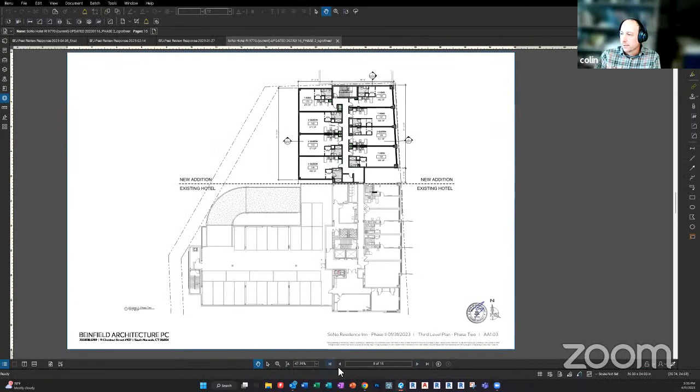There's a pocket park, I'll call it, for lack of a better word—essentially an alleyway between the two buildings created to accommodate the necessary utility transformer. We tried to reuse as much of the space as possible for function space associated with the hotel. Initially, it was our hope that it could be located further towards the street and adjacent to it, maybe create a gate that could make it semi-privatized or opened up to the public if there was an event, with people filtering in and out of that space.

But in discussions with the utility, that proved to be in contradiction to what they were looking for in terms of securing access to their transformer and being able to pick and replace it in the event of an outage or a malfunction with the equipment. So we felt we made the best compromise for the space and created this outdoor space as an annex off of the indoor hotel function space that could be used by people renting the space, with a bit of private outdoor space available, creating an urban courtyard.

This creates an urban courtyard for the hotel's function space.

It's not a particularly generous space, but in my own personal experience, sometimes these spaces can be quite special. If you're surrounded by brick facades with nice lighting and some nice furniture appointments, it could be a nice spot for a wedding reception portrait or some sort of party.

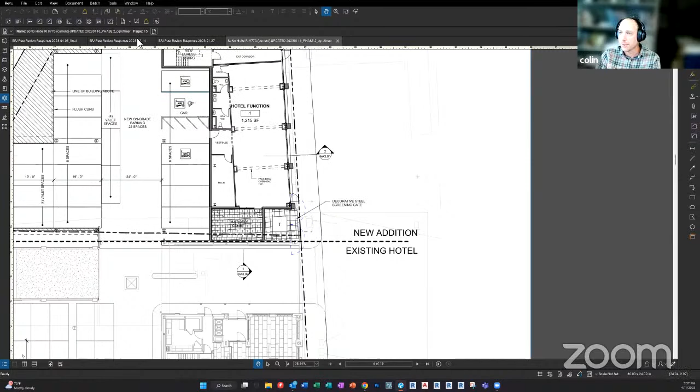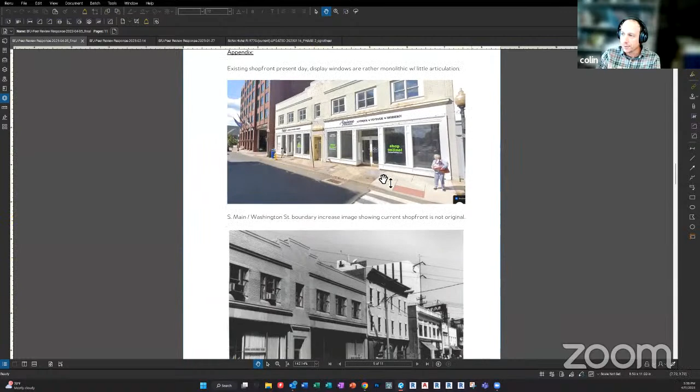The other item we didn't take particular exception to was that he suggested we raise the sills of the windows, specifically the shop front windows, to be more in line with a traditional shop front that's elevated a little bit. We don't have any objections to that, so we will gladly raise it. It's also a little bit better of a waterproofing detail for us, so that's not under dispute.

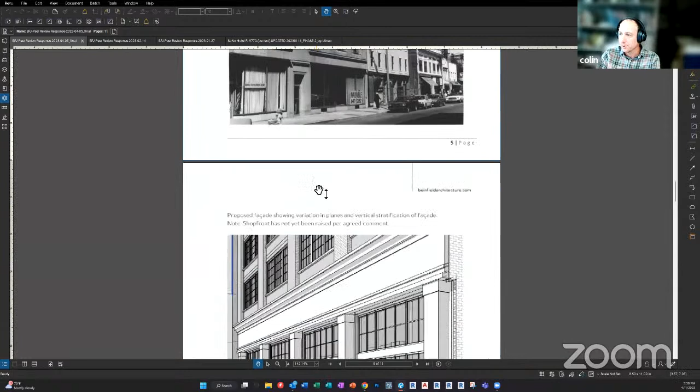The last piece we really took objection to was the further recessing of the windows and the glazing plane of the hotel. We feel that it's already articulated fairly extensively compared to a lot of modern buildings that get developed. The glazing plane is already stepped back fairly far—it's a deep recess from the overhead, about 18 inches.

The pilasters project pretty proudly. The distance to the glazing plane, once we construct the lower wall, is probably going to be a little more than 18 inches, more in the neighborhood of 20 or so, once the panning and other things are installed on the window. That's a fairly significant step.

You also have the entablature projecting forward a little bit. It's detailed, with some profiling and moldings that give it some meat. It's fairly tall in terms of the signage band, so it has good presence. There's architectural lighting on the pilasters, and that's more or less in line with the brick pilasters up above, as you can see. The face of the signage band is more or less even with the face of the pilasters, and the pilasters up above are proud of the facade, the plane that the windows are in.

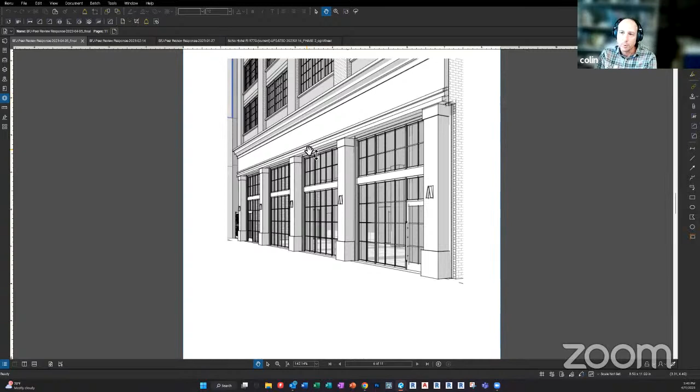So we feel like we've already got a lot of planes going on there, and this is a very constrained lot. Moving the glazing plane further inboard, we don't feel is going to improve the architecture any, and it's only going to take functional space away from what we hope is going to be a vibrant internal space.

Based on recent projects we've done, like the one on Chestnut, this is the interior of a double volume space we did right on Chestnut Street. There's been a couple times in the past year since the building's been occupied that it's been full of life. There was recently an artist market this past fall, I believe, with probably 100 or so people and various vendors in there, kind of a pop-up bazaar, if you will. There was lots of activity going on, and it functioned really well. It was a space that felt good and didn't feel overly constrained when people were in there.

Narrowing up a space like this, even by a few inches, is going to really impact the amount of program that you can squeeze in there. When you're talking about your electric room, your ADA accessible bathrooms, and other back-of-house services, a lot of those things these days, as we trend towards more energy efficient buildings, just take up more and more space, because we're dealing with equipment we didn't have before, like makeup air units and higher efficiency air handlers. The electrical requirements continue to evolve, and everybody wants their equipment to be safe.

So there are service clearances that need to be adhered to, and sometimes inches do matter, and compressing that space further is just going to be detrimental to what we can do in that space. I didn't feel that the benefit was really there. It just seemed to be a comment they were harping on, and really wanted to leave that decision up to you.

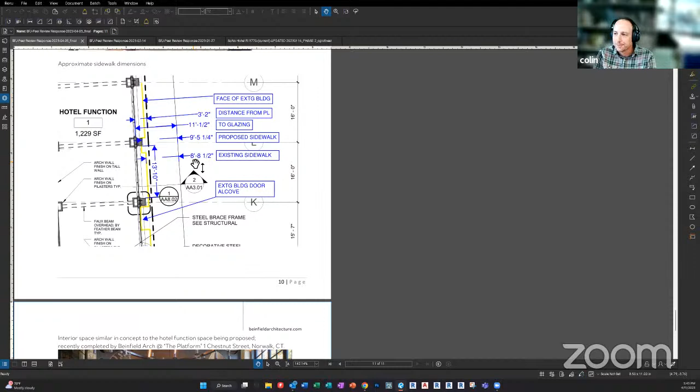If I may, go back to your Chestnut Street photo. With the sills in on South Main, it will be looking something like that from the inside.

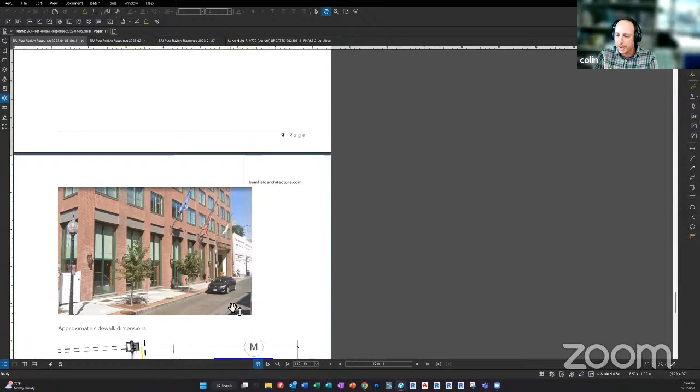Yeah, correct. We probably go a little bit higher than the existing hotel, which I included a picture of. The existing hotel sills are fairly low, so we'd probably pick it up a little bit higher than that. Somewhere between this one and this one, I think about 18 to 20 inches, and the hotel is probably only in the neighborhood of 8 to 10, so probably a happy medium. But I wouldn't think we'd go much higher than the Chestnut Street project.

Okay, that looks very nice. I'll open the floor to any other questions.

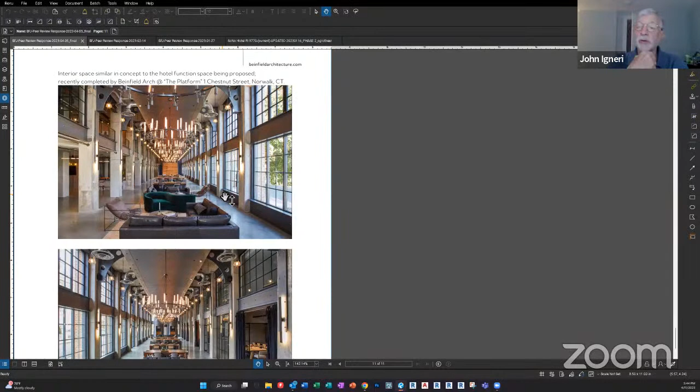I have a couple questions. This is David Westmoreland. How are you? How wide is the space, the function space?

I had that dimension on there, I think I described it in the narrative. Believe between the pilasters, it's in the neighborhood of 18 and a half feet.

So you're starting to get into that too skinny realm. It's really starting to compress vertically, and you need some width. We do get some relief in the architecture there, but my concern is more just being able to create an elegant and dramatic space that's similar to the existing hotel lobby and our recent work at Chestnut Street that has a grandeur to it.

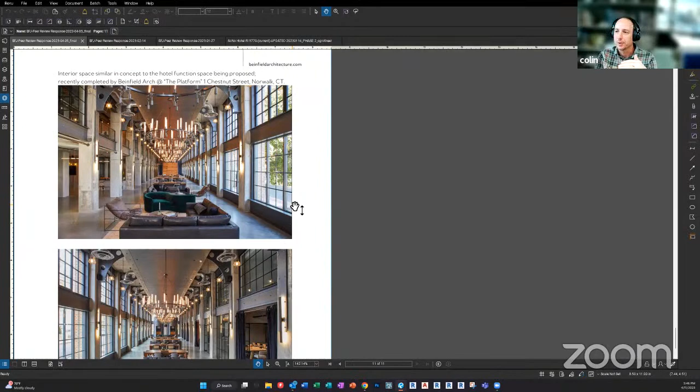It's going to be a little bit lower because one of the things we did react to with the peer reviewer was bringing the entablature down. That was one of their comments that we addressed. So we already stepped it.

The reason I asked that is the design reviewers seem to want to use that space as storefronts, two storefronts I think, as I recall. That's the way I read it anyway. And he was looking at recessing the doors so that it would mimic, have some reference to the existing building's doors. That's what I understood his comment to be. I don't agree with him regarding the use as storefronts.

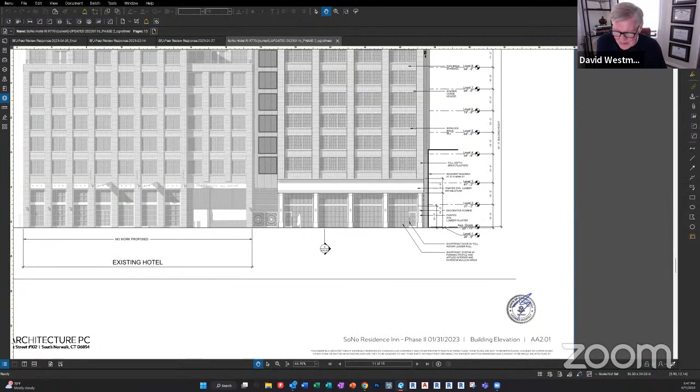I did try to use the Marriott's meeting rooms upstairs once for a CMEC board meeting, and it was too small. And I do think this will be a good use because we need a space like that for meetings that really doesn't exist in South Norwalk particularly easily, like in the form of a hotel. So I don't have any issue with that at all.

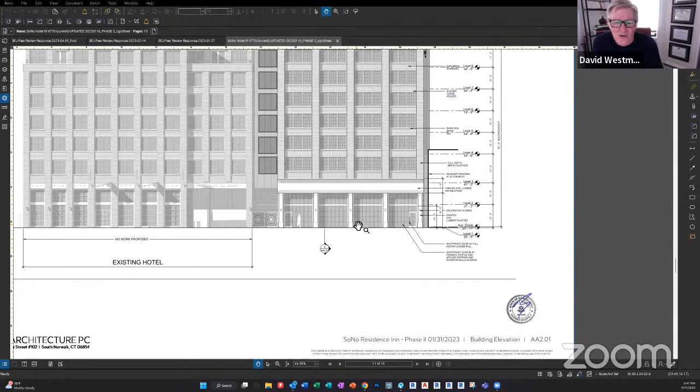But it looks like on the drawing you're showing now, at least the drawings we looked at and the reviewer looked at, it had 2 sets of double doors in the 2 middle windows. And it looks like now you've changed those to single doors, pushed up to the very ends of each side of the building. Am I reading that correctly?

I think so, yeah. So we do have an egress door on the right-hand side, and an entry door on the left. We are somewhat flexible on this door, it could probably be positioned in any one of those alcoves. They're designed to be identical and flexible. This one is an egress door that's picking up the stacking stair and discharging out into the street.

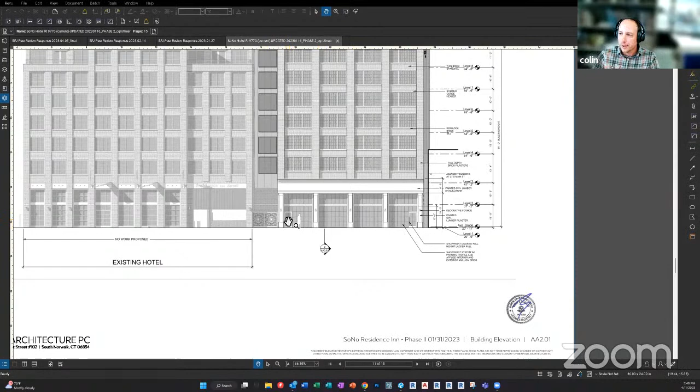So we do need a door down there to make that programmatic element work, but we are flexible on where that door is located. I believe I just located it on that side because that was the wide end of the space, if I remember. That was kind of where the space was widest, and I could accommodate an entry and mechanical program down at that end and create some definition of space there that was symmetrical along the facade, and also just balancing the entry door look.

I actually think I like this better, because the problem I had with the 2 double doors in the 2 middle ones was that without recessing them, it just seemed weird. It seemed like you were going to just fall out of that space. And also, it creates a space that wasn't broken up by doors.

It's not a particularly high occupant load space, even for a function. A single door is going to accommodate well over 100 occupants for means of egress to the street.

I felt like putting the doors in the middle was just going to chop up the space, and then people are going to be entering into the middle of whatever's going on as opposed to the side. So there was that logic as well. You'd be able to set up some sort of a receiving here, but again, this is preliminary program. It is functional, I think, but we'd like to refine that as we go forward with the project.

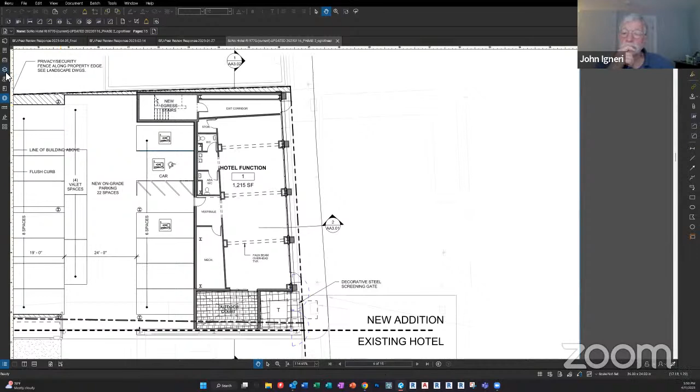Any other comments? Mary, Lisa? For me, I think I like the comments, David's questions. So I kind of go along with David's questions. Okay.

So I did have one other thing that I thought I asked be covered, if we've talked through all this. In the consultant report on the existing building that was submitted with the zoning package that I saw, she recommended that key elements of the facade be preserved and reused somehow in the new building. And I wondered what the plans were for that.

Do you know which report that was? I'm only aware of the one from, I don't remember his name, Mr. Devonshire out of New York, that was submitted with the application. It was the one that talked about the tremendous brick spalling, which I didn't agree with at all. It overstated the spalling and the condition of the bricks.

Okay, yeah, I think that was Mr. Devonshire's report. Sorry, you said she. I thought it was a she. Sorry, okay. No problem. Yeah, he.

I'd have to defer to the owner as to what they're willing to do, but our charge was to look at this as a new construction build, and so far we haven't received information to the contrary that they have any intention of doing otherwise. Alan, I think you're on.

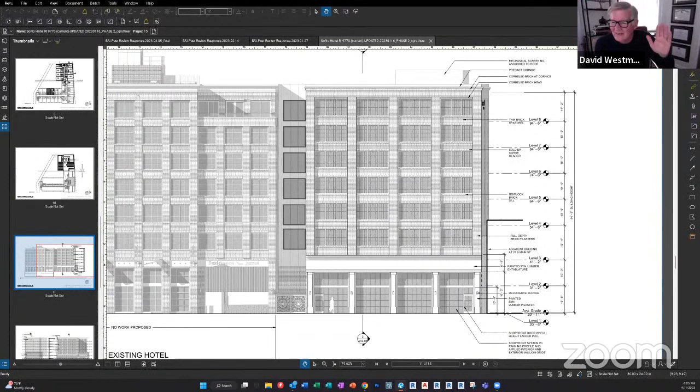Okay, we understand. I make a motion to approve the design work as discussed, subject to updates on the facade inclusion. Does that work for everyone? No one's objecting? So do I hear a second on that motion? Second. Okay, all in favor? I can't see everyone, so please verbally. Aye. Aye. It sounds like it's a unanimous vote.

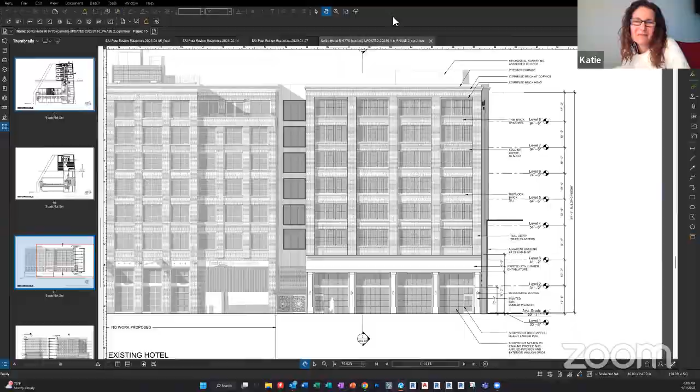Is everyone satisfied with the outcome here? Okay, so we've approved that design, and we move on to item 6, which is new business. I don't see any. Ryan, do you have anything you want to discuss? No, I think we're good. Okay, do I have a motion to adjourn? So moved. Okay, all in favor?